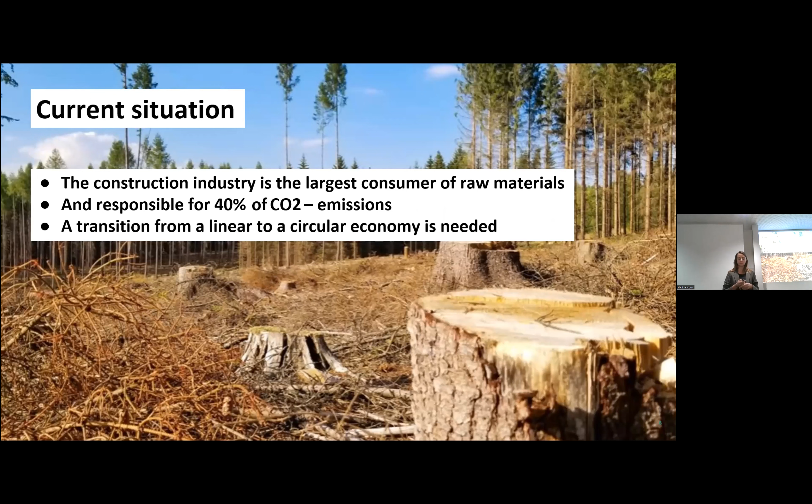The main problem here is that we have a lot of materials in existing buildings. However, we don't have detailed information on what is embedded in these buildings: for example, what the material is, the amount of each material, its quality, and where we can find these materials. Therefore, we proposed a material passport. For example, for the Empire State Building, it would say that it consists of 57,000 tons of steel columns, 6,500 windows, and that it was built in 1931. These are just a few things that a material passport can show. I will now go more into depth on what it can tell us.

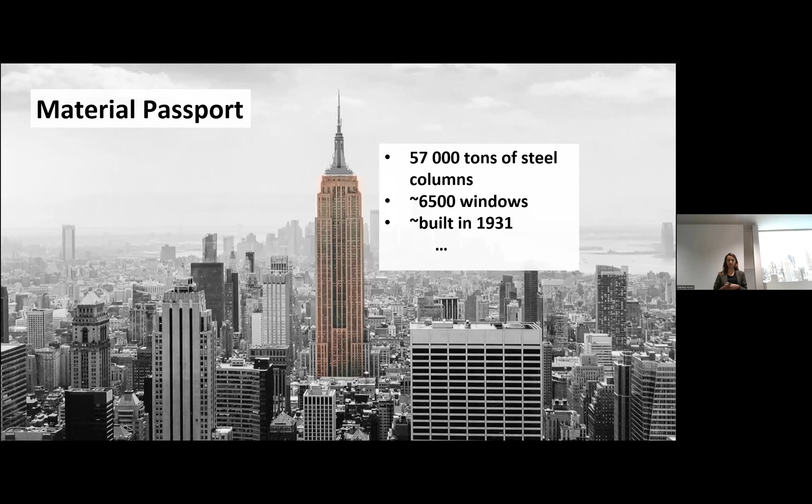Shortly, an overview of the presentation. I will start by explaining how a material passport can be compiled for new buildings. Then I will proceed with how this method can be applied to an existing building. And the third part of my presentation is how we can get information on the building stock through different digital technologies. So back to the first part. Here I will explain what a material passport is and how it is compiled, and I will apply the material passport to one case study.

So what is a material passport? It has been explained by several parties as a passport that gives value to materials. It's very similar to how we have defined it in our research. So we would say that it is a qualitative and quantitative documentation of the material composition of buildings. So it shows which materials exist, what amount of these materials exist in a building, where these materials are allocated in the building, the share of recyclable and reusable materials, as well as waste materials that this building would cause at the end of the life cycle of a building.

And what we added additionally is the LCA. So we also assess the environmental impact of materials. In particular, this is the global warming potential, so GWP, the acidification potential, AP, and the primary energy intensity, PEI.

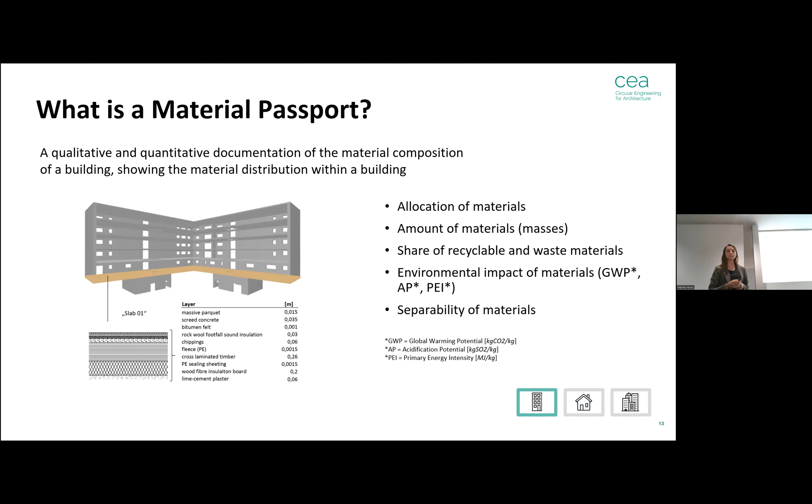Now to the scope of the Material Passport. So today, in the first part of my presentation, I will show the MPA, so the Material Passport A, and the Material Passport B. And the second and third part will be about the Material Passport D, which is an inventory, so at the end of life cycle stage of a building. Now back to the MPA, so the Material Passport A. It is being generated in the conceptual design stage of buildings. And it enables a rough analysis and optimization tool in early design stages. So here you can make variant studies. For example, you can make a building out of timber and out of concrete, and then compare these two variants.

For the preliminary design stage, the MPB, it also enables an optimization of the selected variant, but still you can make some changes of the layers and also replace some materials. For example, you have an insulation which causes a lot of CO2 emissions, let's say, and then you can replace it and try the new variant. I will not go into MPC, so the Material Passport C. And the Material Passport D is documentation, so it serves as an inventory of existing buildings.

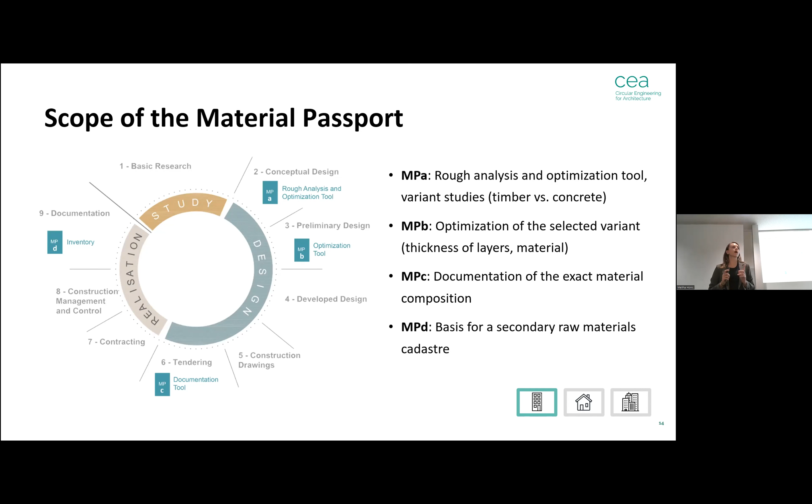I don't know if all of you are familiar with BIM. So this Material Passport has been created with Building Information Modeling, so shortly BIM. I will just explain very briefly what it is. So a BIM is not just a 3D representation of a building. It also consists of the information. So the I in BIM stands for information. For example, if you have a window within a building, it can show the thickness of the frame and the material of the frame, and also of the glazing, if it's 2-layered, 3-layered, and so on. And exactly this information is needed for a Material Passport. So that's why we used BIM to compile the Material Passport.

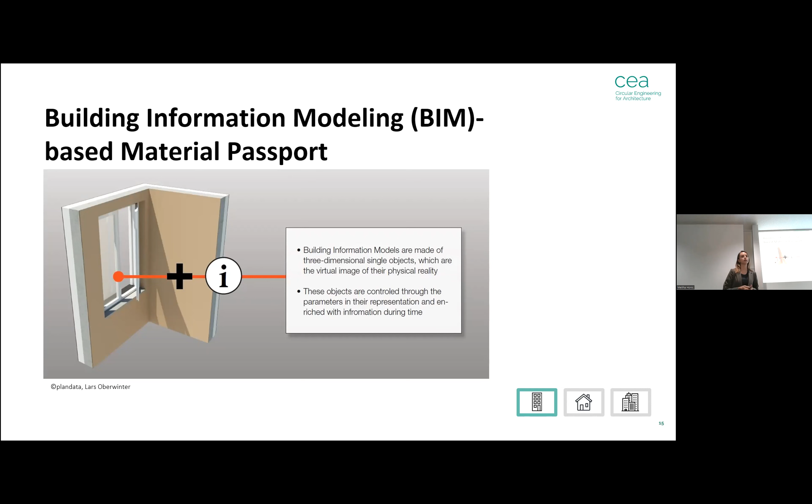Now to the structure within BIM and how this Material Passport is being generated. We start with the element level, because that's the level on which you build a BIM model. So that's one object, for example, a wall. Each of these objects has a globally unique identifier. So this is assigned to each element when you model in BIM. With this, you can find the specific element within the whole building. So you have the allocation.

When you scale down to the material level, you come to one specific material where the properties to generate a Material Passport are assigned. So for example, you have the timber layer, and then you have property 1, for example. This can be the thickness, it can be the CO2 emissions, it can be the reuse potential, and so on. If we scale up, we come to the component level. It would be each slab which has the same material layers. They are summed up to one. So slab 01 consists of slab 01A, B, C, and D, for example. And if you sum up everything, you have the results of the Material Passport for the whole building. So you have all slabs, all windows, all walls, everything you have in a building.

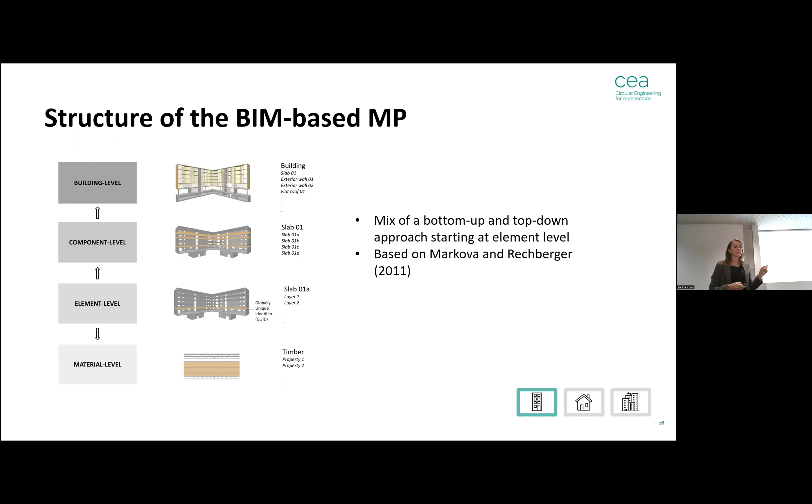Which data did we use to do that? So I'm from Vienna, from Austria. So we decided to use an Austrian database, not only because it's Austrian, but also because it delivers consistent data on material passport information and on the LCA. Because for the LCA, we have, as I mentioned before, the global warming potential, acidification potential, primary energy intensity. And for the material passport data, we have assigned to each material a grade, which gives them a percentage of recycling potential. So for example, if a material has grade 1, this is usually timber, it can be reused or recycled to 75%, and 25% of this material would end up as waste.

And by linking each material with these grades, you then can sum up on the whole building the percentage of reuse potential and waste. And what else did we use? We used building elements. So these are predefined elements that you can get from this database. These were used because the names of each material were the same. So we had consistent data.

If we started to get material passport data from a different database, we would have the issue with mapping. So you would need to map, for example, the recycling grade from one database to the LCA data from a different one, and that would just cause problems. So we decided to keep it simple. We just use this database because also, as that was my PhD thesis, the focus was more on how we can compile it with BIM and less the method behind.

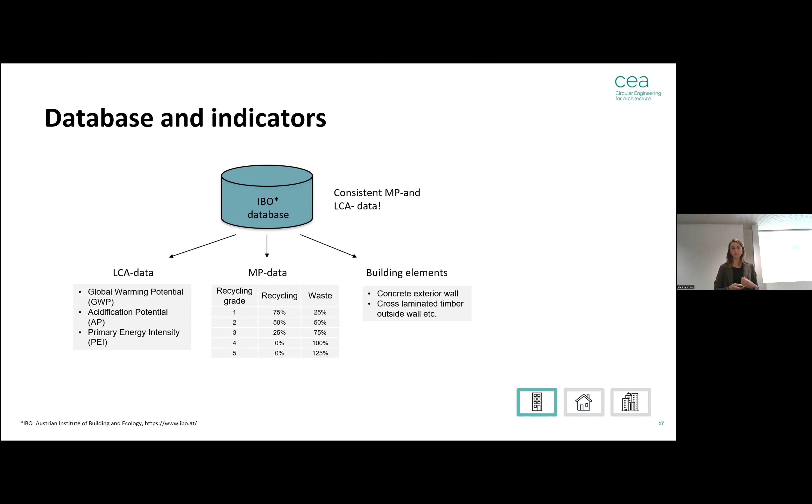And here I would like to explain how the recycling potential, the masses that will be reused or recycled, can be calculated. Just shortly, you see it is one wall with an area of 1 square meter. It's a concrete wall, basically. We obtain the density from IBO, so from the database I mentioned before. The volume we would obtain from the BIM model, because you model it such that you can obtain the volume from there. And the recycling potential you map also from the IBO database.

And this is how you would, for example, for this wall, get reuse masses of 207 kilograms. However, in this method, the separability is not considered, like in the IBO method itself. That's something that we added. They just propose, for example, when two materials are glued with each other, so this is now in German, sorry, but if you have bitumen with concrete next to each other, you would then downgrade the grade. So if it was 2, it goes down to 3.

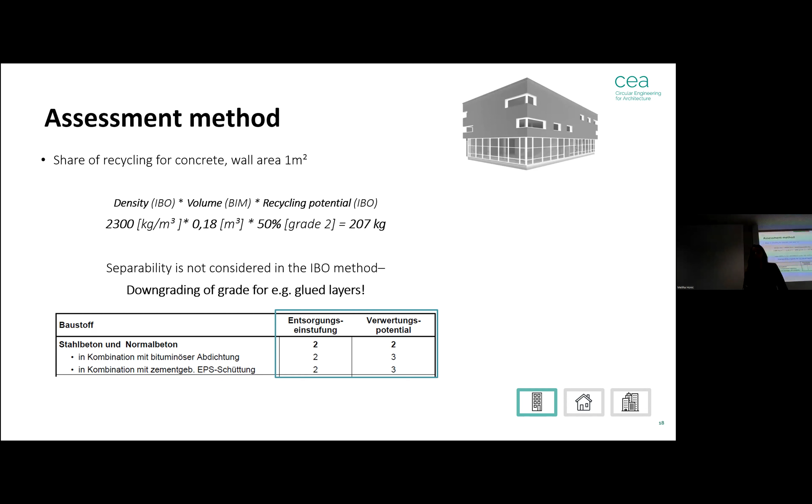So now to the part how we have done this. On the one side, we have the BIM model, which we model based on a modeling guide. This was also created by us within the project, and based on the building elements that we have obtained from IBO. These building elements, material names and element names match those from the material passport and LCA data. So that's how you can map them.

On the other side, we have the data management and assessment tool. This is actually a tool integrated in BIM, which enables a bidirectional synchronization. So whenever you create something in BIM or make a change, you can synchronize that, and in the database it's being updated. For example, you tried one variant, you need a thicker insulation, let's say. If you change that in BIM, this is automatically being changed also here, and all the assessments are being updated. So also the material passport you directly get from this data management and assessment tool.

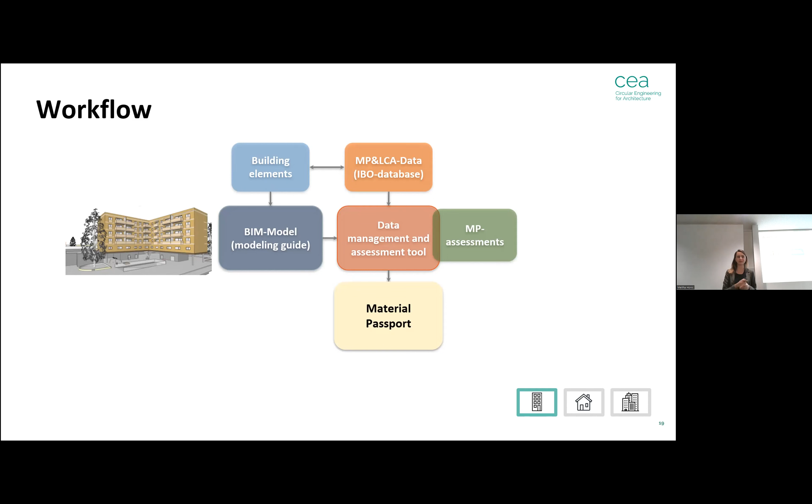Now a bit more in depth how the modeling works. Sorry. Now this is back to the design stages. On top you see the conceptual design stage. In this stage, usually we don't have the information yet on exactly which materials we will use. So in this stage, the designers would be able to model a building with dummy materials, so they don't define the material. But then they can map in the data management and assessment tool different variants and can calculate, for example, the recycling potential and the CO2 emissions and so on. So they can get the results. And then they decide which variant they would like to work with.

So again, on the BIM side, you don't have any properties except the area and the classification. So you would need to model a wall really as a wall, such that you can map the right element from the data management and assessment tool. But the material does not have to be defined. And also the thickness does not have to be correct. You can change that in the data management and assessment tool.

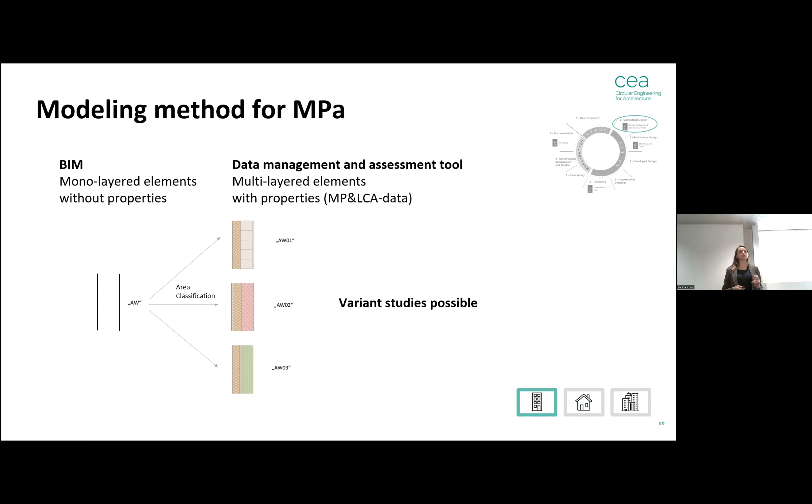For the material passport B, so for the preliminary design, you already model with the variant that you have chosen. And the information that is being transferred to the data management and assessment tool is the volume, the thickness, and the material name. So from the data management and assessment tool, you just get the material passport data that you need and the LCA data that you map. So here you can still make some changes of layers and of specific materials and thicknesses.

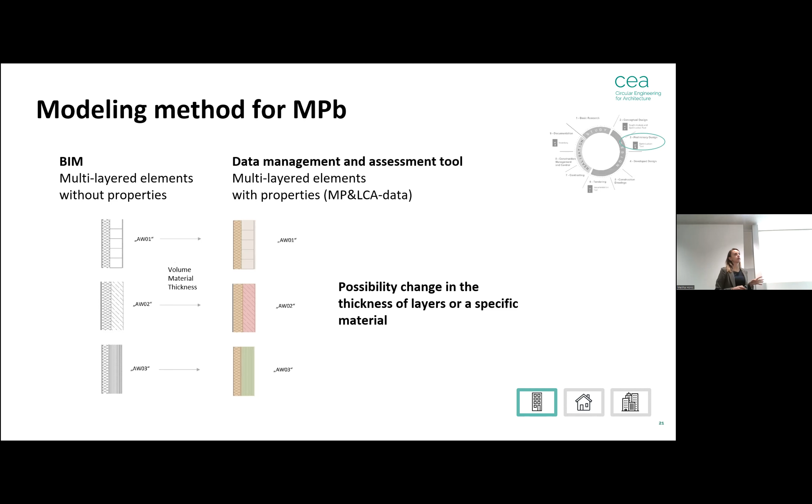Now I will explain how we have applied that on a case study. This was an office building. It was not built; we just had the design of this building. And we tried this method on this building.

Actually, this was the second one. We tried it first on a timber building. This is a concrete building, and it consists of 3 floors, and the load-bearing element is reinforced concrete.

On the left side, you can see the model for the material passport A, so we don't have any materials defined. On the right side, we see the model for the material passport B, where we already have multi-layered elements and the materials.

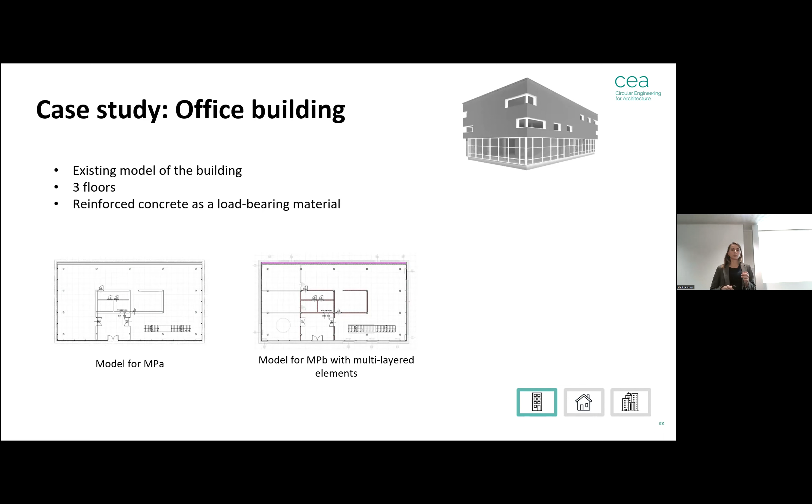So one of the results is this. It shows the recycling potential of the whole building. I did not put every result here, but you can ask me later if you have more questions. The design of this has been done very similar to the energy certificate, just so that people feel familiar with it and would like to work with it. The recycling potential of this building is about 50%, and the grade is 2.5. We have grades from 1 to 5, where 5 is very bad and 1 is very good.

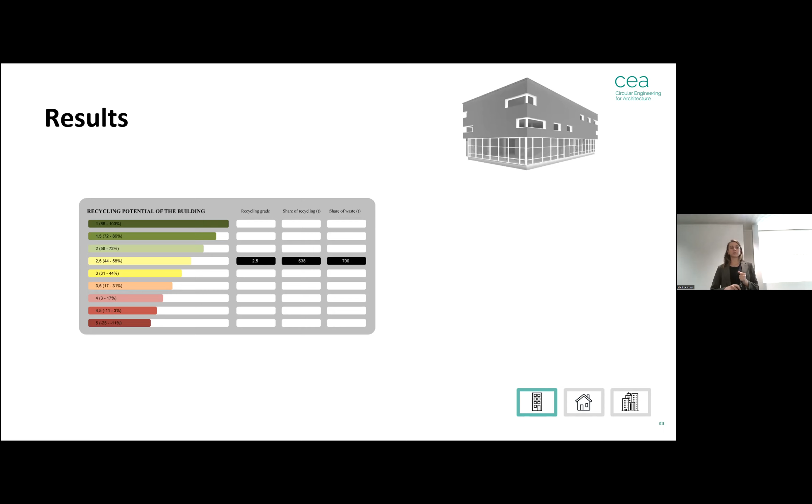To the results, what the material passport can also show is the total material composition. Here you see it has a lot of concrete because the load-bearing element is out of concrete. We also have some sand and gravel and some other materials. On the right side, you see the waste and recyclable mass of each material.

For concrete specifically, it's 50-50. For sand and gravel, you have a bit higher recycling potential. Here you can see where you could make some optimizations. But in this case, concrete takes up so much of the mass that the only thing you could change would be changing the load-bearing element.

Yeah, these were the results for part 1 of my presentation.

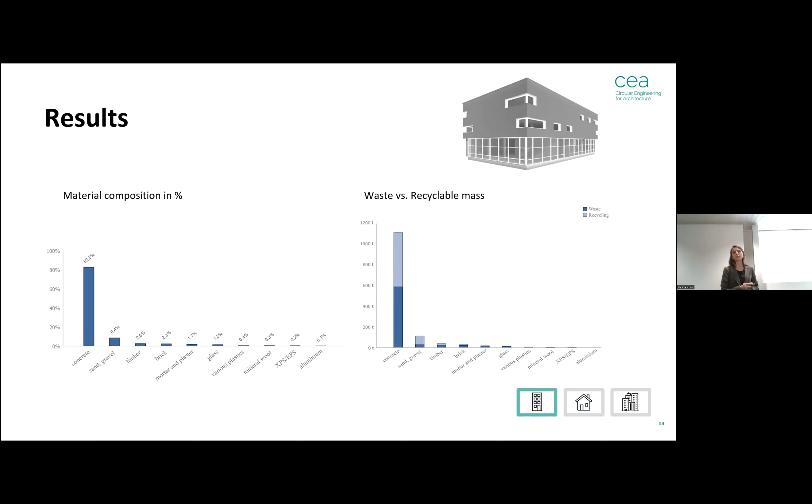Now I will continue with the second part, where we have applied the material passport on one existing building. I will show the digital technologies that we have used to acquire data on this building. We also did a manual acquisition and compared the costs and time efforts of these technologies with the state-of-the-art data acquisition.

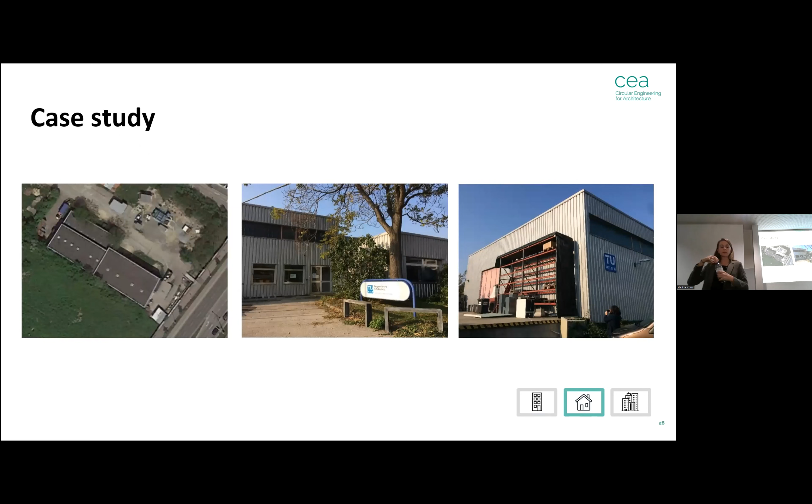So this was a real building of TU Wien, which has been demolished after we've been there. So we could use destructive methods to really check all the materials within the building, which was the good thing about it. So now this building doesn't exist anymore.

We did the manual data acquisition in 2 ways. We did a normal, standardized pre-demolition audit, which has to be done for buildings bigger than 700 cubic meters in volume - at least in Austria, this is the law. And we did an urban mining assessment, which goes more in depth, where we checked almost each wall, each slab, and so on to get the material information.

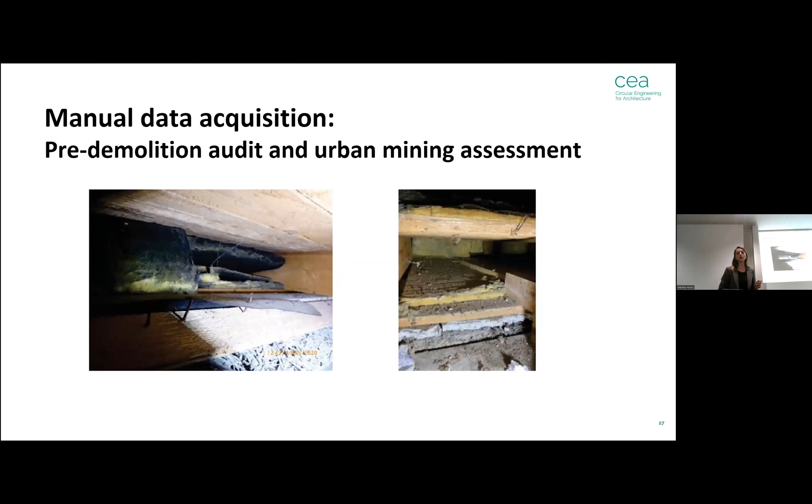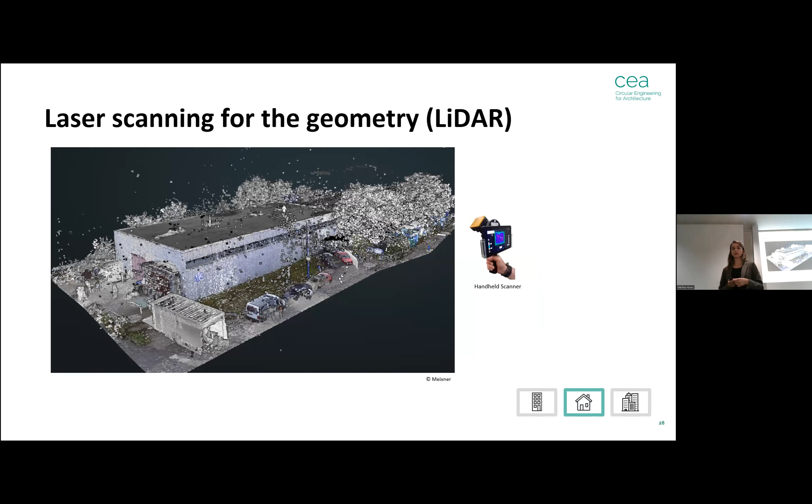We also used laser scanning for the geometry. With the handheld scanner, we scanned the interior and the exterior and obtained the point cloud from this building. From the point cloud, we generated the BIM model manually, with BIM objects created on top of the point cloud.

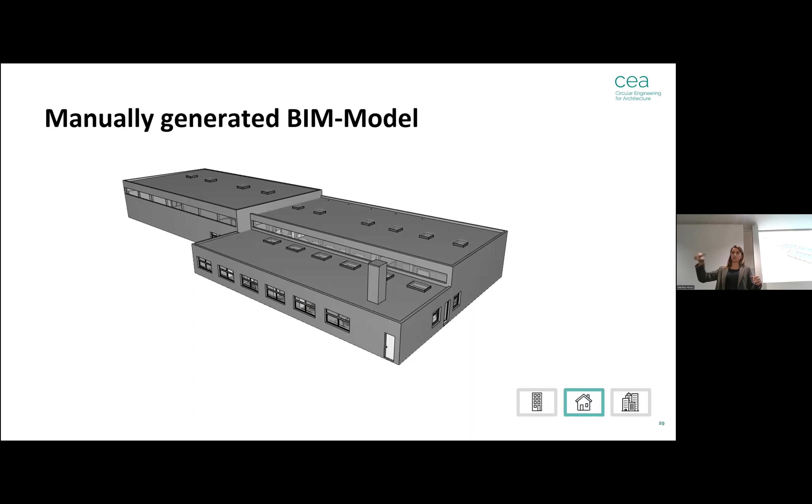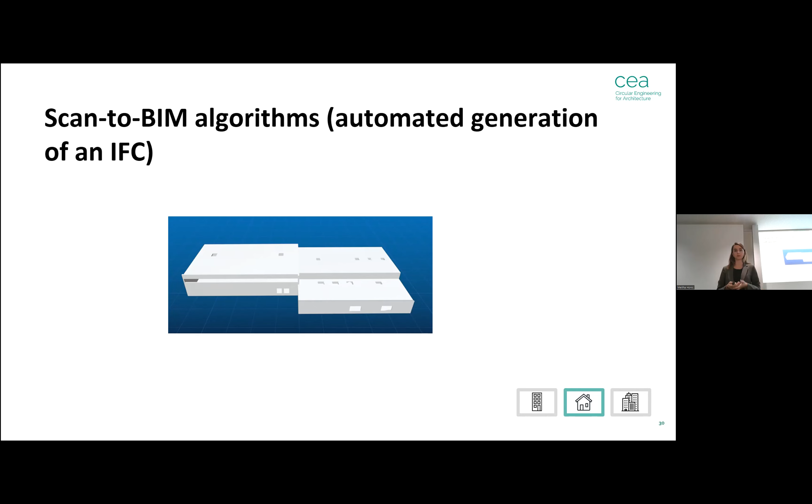So at this stage, it would not have been possible to create a material passport with this model, so we decided not to use that.

Here is the workflow to generate the material passport. There are several - sorry, there is an S, but I think you already know that it's a passport and not a sport.

So we have the geometry acquisition that was done with laser scanning. We created the point cloud and then the BIM model with dummy materials or without materials. Then we also did the demolition acquisition, that's the pre-demolition audit, and an urban mining assessment, which is more detailed. From both of them, we obtained the list.

The pre-demolition audit looked more into the quality and into whether there are harmful materials that we should not reuse or recycle, like asbestos, for example. And the urban mining assessment went more into depth, checking each slab, each wall, as I said before.

Then we brought these two lists together. So we had the material composition of each wall, slab, and so on with the quality, and integrated that afterwards in the BIM model. And from the BIM model, we extracted the list of materials and again mapped it with the IBO database, with the information we needed to generate the material passport.

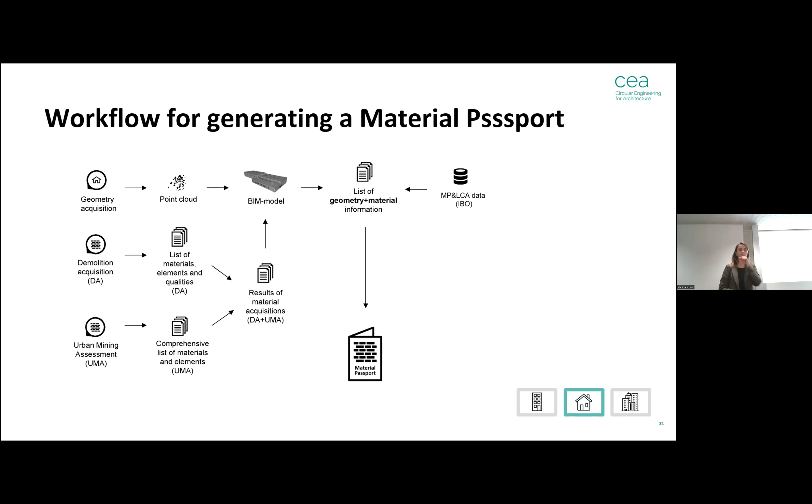What else did we do, which is quite a new thing? The ground penetrating radar we applied to detect materials within walls and slabs. Actually, the ground penetrating radar is not a new thing. It is being used for archaeological investigations on site, but it has not been used before for material detection within buildings. On the left side, you see the use case that we have used for that.

So this person is applying the GPR on a wall. They have really done this like three times for each wall and quite often also for the slabs. So we had a lot of data. On the right side, you can see that you can also apply it outside. This was a different project, I will come to that later.

The outcome is, on the one side, a radar image. On the other side, this ground penetrating radar sends electromagnetic waves which penetrate through the wall. Depending on how high the energy is from the wave that comes back, and the frequency, you can make some assumptions about the materials. So this device does not say, okay, this is concrete here, but you get some values which you can use to generate a model. And with this model, you would be able to predict materials.

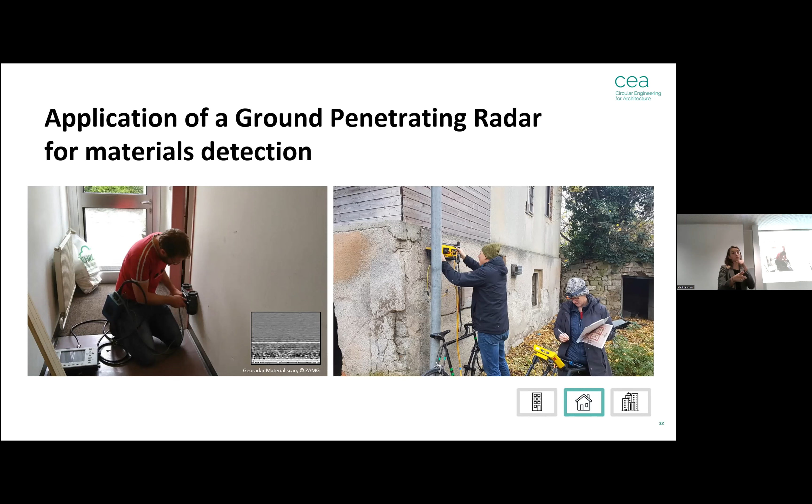So building a database of typical constructions of walls, slabs, and so on, such that you would be able to predict for other buildings if you just apply this device once, to see what is behind.

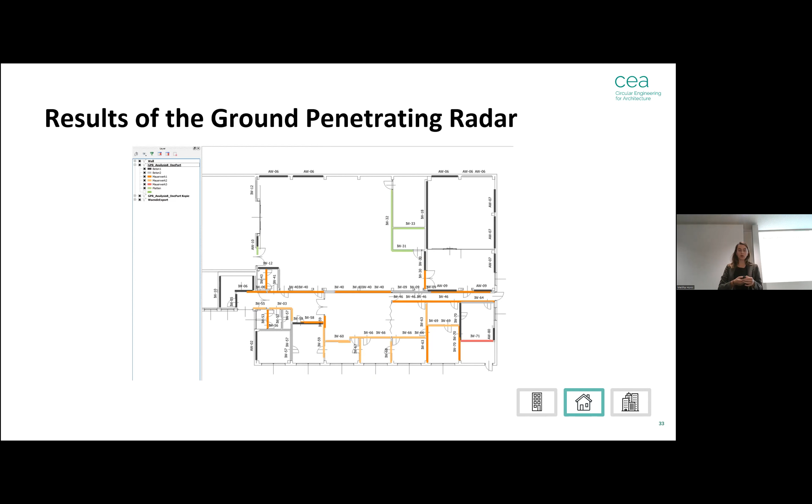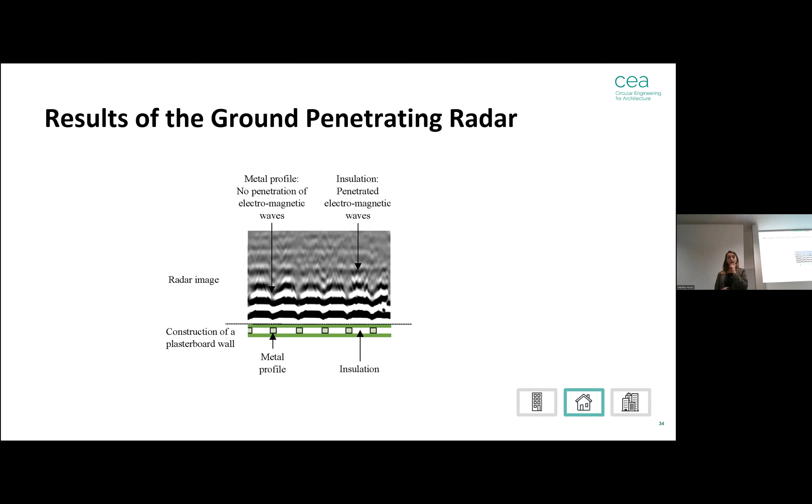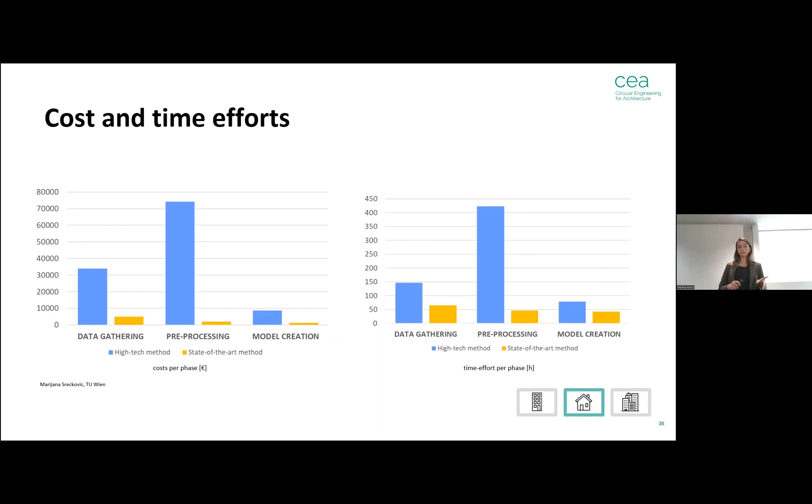That was my second part. I'm coming to the third part of my presentation, and I need some water again.

After we've done the material passport for a new building and for one existing building, we wanted to try, with all the technologies we had applied before, if we could predict the material composition of the whole city. So we had a research project where we visited 10 buildings and made a data acquisition on site to generate a digital urban mining platform. That was the final goal of this project.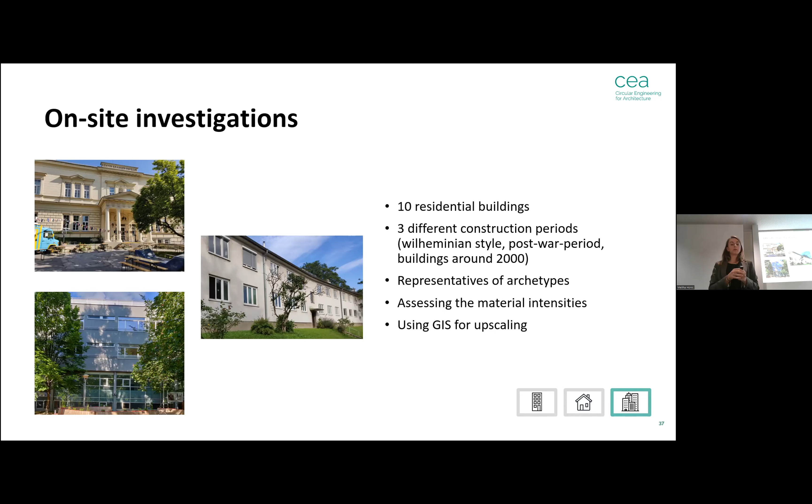And we used GIS, the Geographic Information System, to generate a digital urban mining platform for the city of Vienna. I'm showing some pictures of the on-site investigations.

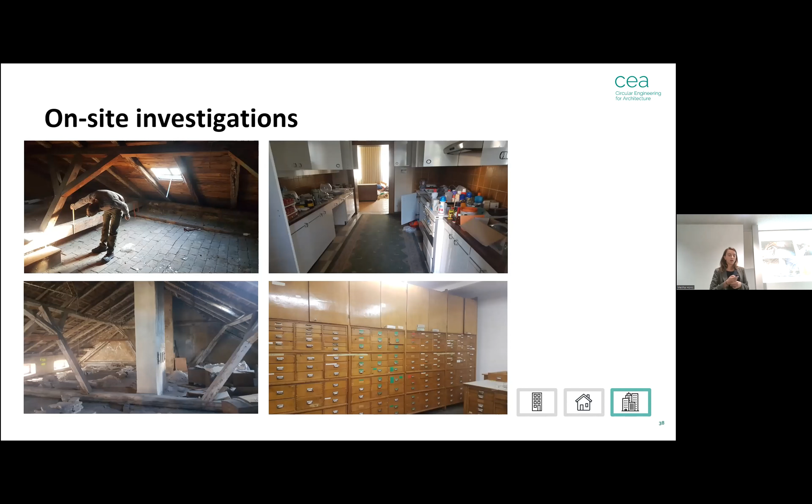This is our colleague who did the manual data acquisition on site. On the right side, this is a different building. You can see it was not always easy to approach each wall and slab because of the furniture—there were a lot of things still in the buildings. Also on the right, really beautiful furniture, but unfortunately it has not been reused. These were just some examples of the buildings.

How did we do the upscaling on city level? By using material intensities for each building that we had visited. There are already approaches working on that, for example from Kleemann et al., who was also from TU Wien. He has assessed material intensities also with on-site investigations.

But he did not use laser scanning technologies or BIM models. Ours is based on laser scanning technologies so that we have a really accurate geometry of the building, and the reconstruction was done in BIM. From BIM, we assessed the material intensities for each floor.

We divided it into the basement, all the upper floors, and the roof floors, because we expect the materials within these three divisions are quite different. For example, for the Wilhelminian style, usually in the basement you have concrete, in the roof you have timber, and in between you have brick. That's why we made this distinction into these three categories.

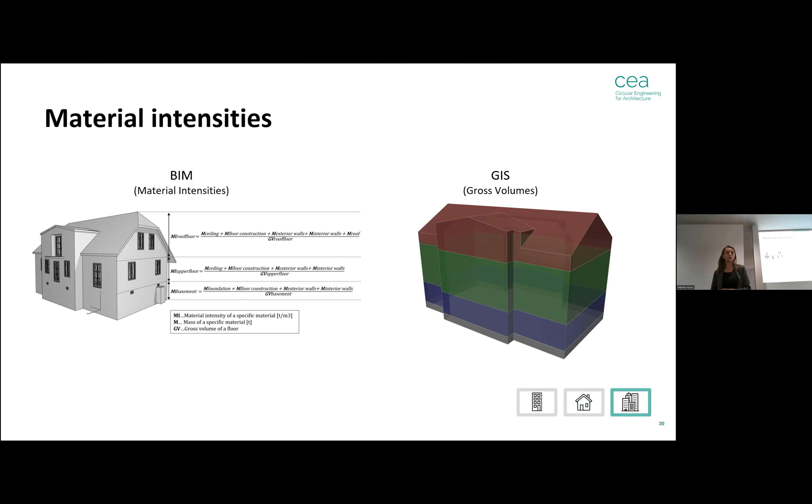Based on the buildings we investigated on site, we calculated the material intensities, provided in tons per cubic meter. To predict the building stock materials of other buildings, you map the gross volumes obtained from GIS. On the right side, this is a model from GIS, divided also into these three categories. By linking the gross volumes times the material intensities, you obtain the masses for this building.

Once again, if it was not so clear: on the left side, you see the information obtained from investigated buildings used to create the archetype. From this, you get the material intensities, which can be tons per cubic meter or kilograms per cubic meter for this typology—in this case, the Wilhelminian style.

On the right side, you see the GIS model, which we obtained from the city of Vienna, and from there you can get the gross volumes. How did we map this? We really used only residential buildings and buildings from this specific construction period.

So either Wilhelminian style or post-war. You map the material intensity per basement floor with the gross volume that you obtain from GIS for other buildings. You do that for each category, and in the end, you can sum up and predict the material masses of one specific building or in the city.

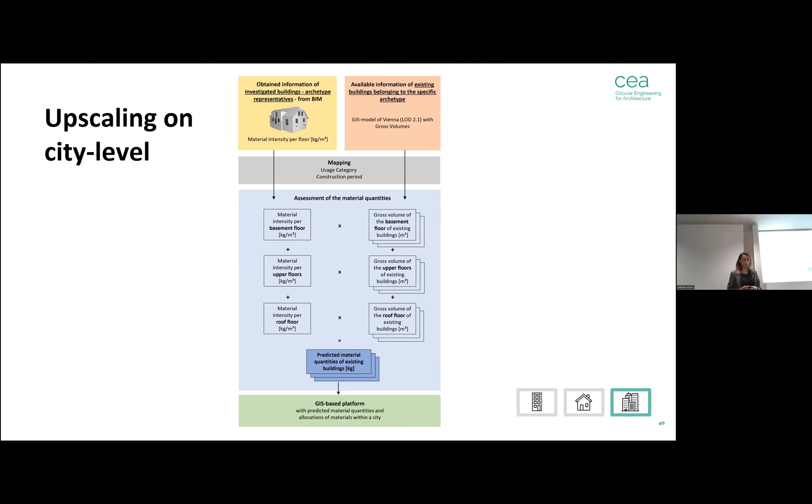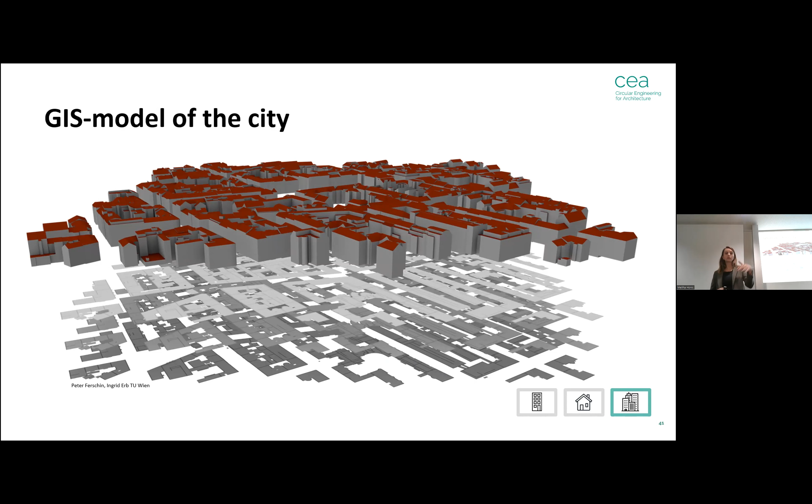And this has been integrated in the GIS-based platform, which partly looks like that. So this is the reconstruction of the city of Vienna. Creating this GIS model was not an easy task. We had different data sources and different data sets, which had to be combined to reconstruct the whole city. So this is just one part of it.

And that would be the proposal for the digital urban mining platform. Here you would be able to select one building, and behind it's calculating the materials of this specific building. For example, for that one, we had a lot of concrete, so beton is concrete.

You can also see, what I mentioned before, you have Kleemann et al.'s approach and our approach in our project BIM Stocks. We just wanted to see if our results are kind of similar or very different, or if we made a mistake. It looks similar, but still a bit different, which is what we had expected. There is not a big difference between his approach and our approach. So we can say we worked on the right thing, but still we cannot say if his results are better or ours. So we would still need to work on that.

With this platform, you would be able to really get information before you go to the building, so you don't have to make on-site investigations. On the platform, you could select a building which maybe will be disassembled in the next 2 or 3 years. You could see which materials exist there, and make a plan for a new building and reuse some or many parts of it. That was it for the digital urban mining platform, and also my previous work.

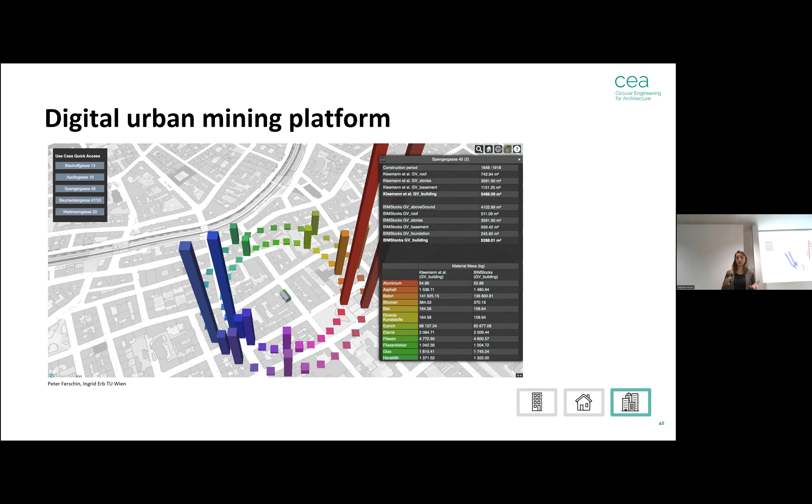So what comes next? As you have seen, it's quite an effortful process to obtain information on existing buildings, with huge cost and time effort needed to connect the start of life of a building with the end of life of a building. For that, I proposed to use blockchain technology.

The material passport information is here for the design stage, but we don't know if this information, for example the allocation of a specific material in the building, the name of the materials, the masses, densities, and so on, will be available in 100 years. And this is the point where a new building will probably be constructed. By having this information, we could reuse materials of existing buildings.

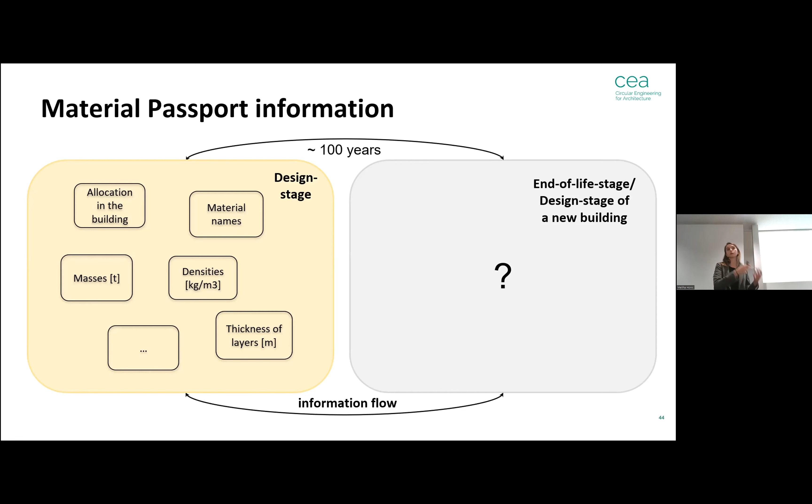So there are two reasons for blockchain technology. One, it enables tracking and tracing of components and materials throughout the whole life cycle, so you could store this information such that stakeholders after 100 years could make use of it. And also you could prevent trust issues, because stakeholders don't want to share all of their information. With blockchain, you could facilitate trust and only share the information you would like to share, so that only those people who you would like to have access would have access to this information.

Yeah, this was it for my future plans. I would like to conclude with the 3 parts of my presentation. For the first part, on new buildings, the material passport is an important optimization tool where BIM also serves as a valuable data source, since you have all this information in the BIM model, if you have modeled correctly.

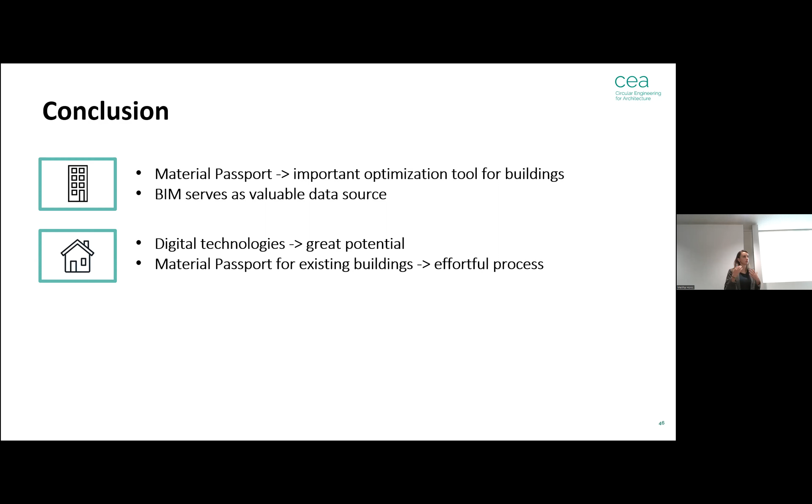Digital technologies show great potential to acquire information on existing buildings, but it is still an effortful process to really do that. Third, a digital urban mining platform would be an important step for reuse and to enable a circular economy in construction. But to really refine the archetypes that we have built, we would need more case studies, acquiring more information on existing buildings, so that we can say our model is really working well.